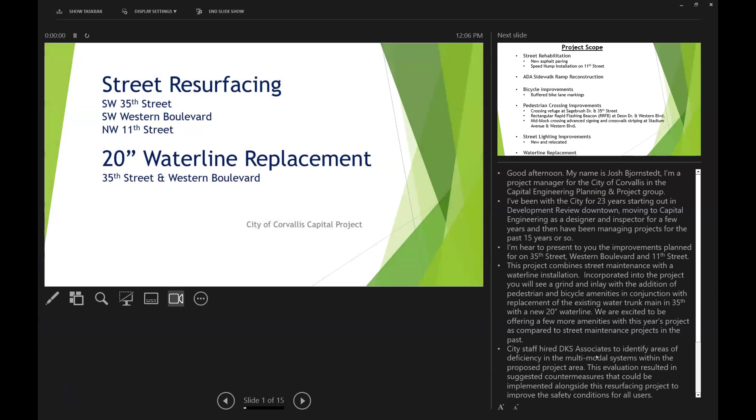Okay, everybody see that? Is that a yes? Steve, can you give me a thumbs up? I'm good to go there. Yeah, you might just want to put it in presenter mode. I'm seeing your notes. Might want to put it in presenter mode so you're... Gotcha, thank you, yeah it's full page, there you go. Bear with me here. Okay, how's that? Oh my goodness, try putting it in presentation mode before you share it. Nope. My goodness, we had this off. Unshare your screen and then put your presentation in presentation mode. I'm not totally sure if this will work either. What we were saying were your notes, we saw your notes, yeah I think I was okay. Bear with me one minute. Let's see here, go back to there. Yay, perfect, okay gosh darn, the two screens gets me every time. All right, my apologies, all right, well thank you very much for having me.

So this is this year's street resurfacing project that we are currently in design on. We will not have a street resurfacing project per se this summer. For this project, we've taken a little more time to look at other aspects that could go along with a resurfacing project, other amenities we could add as far as bikes and pedestrians are concerned. So this one will actually be constructed in 2025, and I'll talk more about timelines a little bit later. But anyway, this project will have three locations that will be resurfaced on 35th Street, and we'll go through the scope of that, and on Western and on 11th Street.

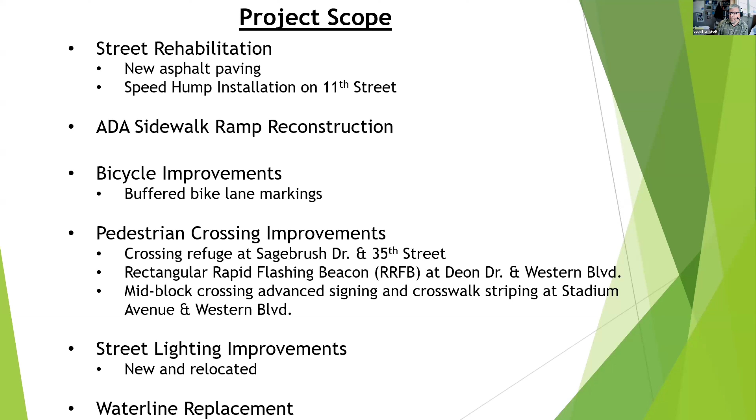Oops. Right. Well, why? Man, my apologies.

Okay, so project locations. We are looking at Western itself. The slide isn't quite showing it, but we will start our resurfacing back at the ODOT right of way of Highway 20 and extend Western all the way to 35th, then resurface all the way north to Washington Way. OSU has some improvements currently happening at Washington Way that will come in after those are done, and we'll resurface the street there to clean all that up.

We have a little stub here on West Hills Road - that's where our water line extends through that location, so we'll make sure we capture all those street improvements or resurfacing with that water line work. We do include the entire intersection of 35th and Western with our resurfacing, again because of the water line extending into that.

The other location here on Western is between 26th and 15th, and that's pretty straightforward. On 11th Street, if you recall, a few years ago we resurfaced Van Buren and Harrison, so that's why you see a gap in the darker line for 11th Street. There are also some gaps up at Fillmore and Taylor where we've got existing concrete we're going to retain - we'll talk more about that a bit later.

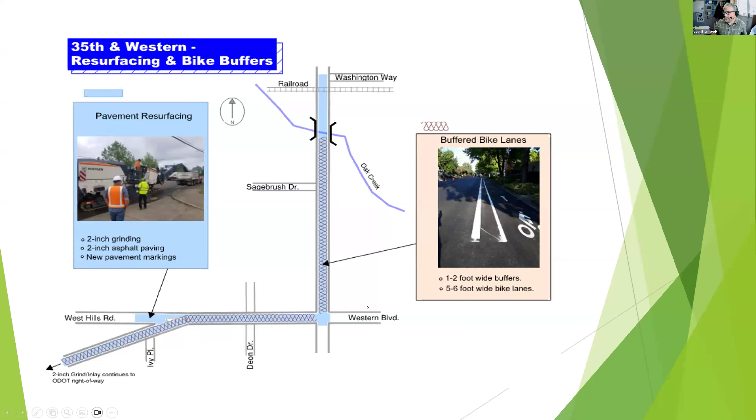We'll have some markings that go in down here at West Hills Road. We'll have some green skip that goes through there where vehicles are turning right onto West Hills, and the bike lane continues on Western. So we'll get that added as well.

In this same corridor, the green dots here are where we're proposing ADA improvements. So all of our ADA improvements are to bring the ramps up to standards for cross slopes, landings, and tactile or truncated domes.

So those locations are going to happen there, the pedestrian crossing refuge just north of Sagebrush. Working with our consultants, we determined there's a high volume of pedestrians that use this crossing, with the retreat located to the west here.

So we're going to install a refuge there with advanced warning signs. There will not be an RRFB, or rectangular rapid flashing beacon, at this time. We will set it up so that if in the future that becomes a need, we can do that. But with the refuge and the advanced signing, it's a vast improvement of what's there.

And given the fact too that it's such a straight sight distance, an RRFB at this time just didn't seem as warranted.

And then finally in the same corridor, we will be adding the rectangular flashing beacon down here at Deon. There was a couple of reasons behind that.

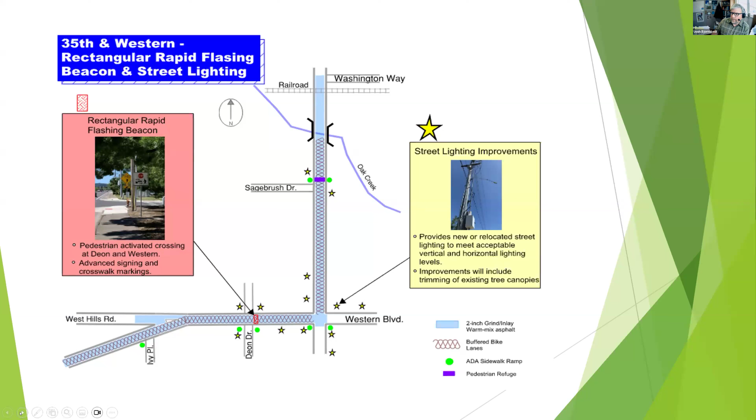So that is 35th and Western. The other part of Western is from 26th to 15th.

Pretty straightforward there, it's a grind inlay. This may change here - I was originally showing this as the turn lane from 26th into Western, or Western into 26th. That asphalt was rather in pretty good condition. We also had some loops in that location that we were trying to avoid.

Once you start getting into that stuff, we were upwards of another $100,000 or so. So we try to do our best, if it's in good condition, to not affect some of those costs on the project. But it turns out we may be impacting loops no matter what.

So this may be a resurfacing all the way to 26th. We're still kind of evaluating that.

As far as bike lanes go, bike lanes will be on Western, but the buffer itself, we start to run out of room in width by the time of that turn lane, the right turn lane, and the added left turn lane. So bike lane buffers will extend from the start of this turn up to the western side of that existing mid-block crossing that's there. We've got sufficient width to provide a 1-foot buffer - it's not the 2-foot that we like to get.

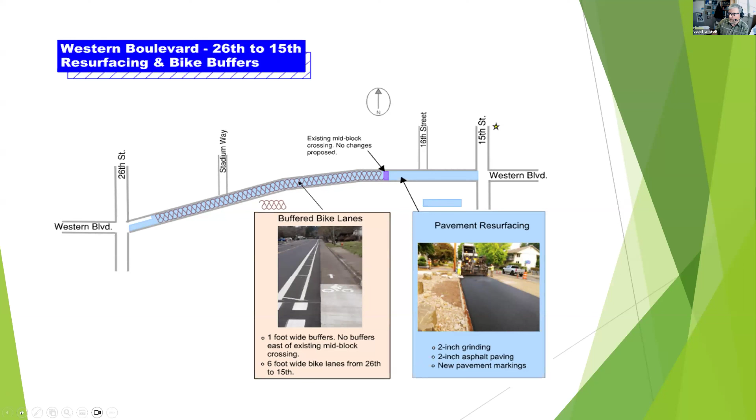Typical 2-inch grinding, 2-inch paving for this section.

In this same section, again, our ADA ramps are the green dots. So we are looking at improving the 2 ramps there at Stadium Way and the 2 ramps here at 15th that are shown. This corner of 15th, the northwest corner there, we are going to actually modify. We're going to enlarge that radius to help our transit make that turn a little easier. Currently now we hold back traffic stop to make a left onto 15th just to help with the buses turning, which has helped, but we have the opportunity to make that a little easier turn for buses by widening that. So we'll end up rebuilding that ADA ramp that's there.

We do not do anything with the mid-block crossing that's currently there, just west of 16th. We do add the lighting as shown on here. I think for the most part, there is lighting there, but we're relocating it again to help with more of that horizontal illumination on pedestrians.

This mid-block crossing here at Stadium Way is a fairly utilized crossing. It is kind of the access for the softball field and the soccer field over there, and at times it can be traveled pretty heavily. So what we're going to do there is some advanced signing. We'll actually stripe a crosswalk on Western. Currently there is no crosswalk striping there. So again, with that added enhancement, we're hoping that will help bring awareness to people crossing in that location.

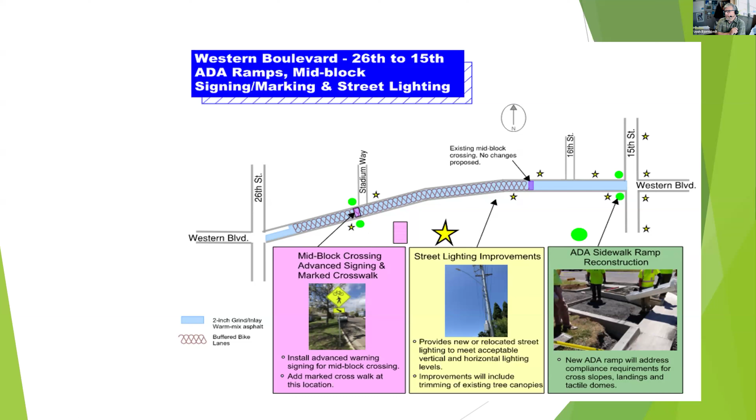So now 11th Street. We are looking at, like I mentioned, kind of resurfacing in between what we've done already there. So again, Van Buren and Harrison was recently done. All the ADAs are done at the corners. And this other area we're skipping out here is existing concrete that's down, which is in very, very good condition.

We are going to leave it as concrete, and we will pave asphalt up to the limits that are there. It's a good material that's down, in very good condition, and just didn't seem to make sense to tear that out just to put asphalt back in there.

The location at Polk and Tyler, my next slide will show some ADA ramps being done at these locations. That's going to be a more extensive full depth reconstruction. We've got some drainage patterns in those locations that lead more to a corner drain, and we want to push those drains to the outsides of our ramps. So there'll be a little bit of reconstruction work happening in those two locations.

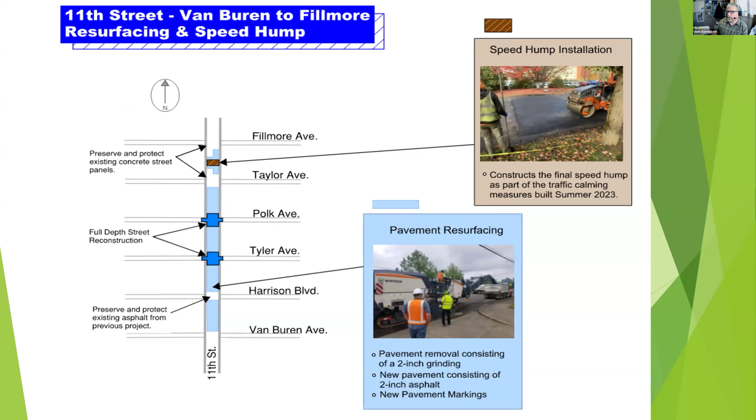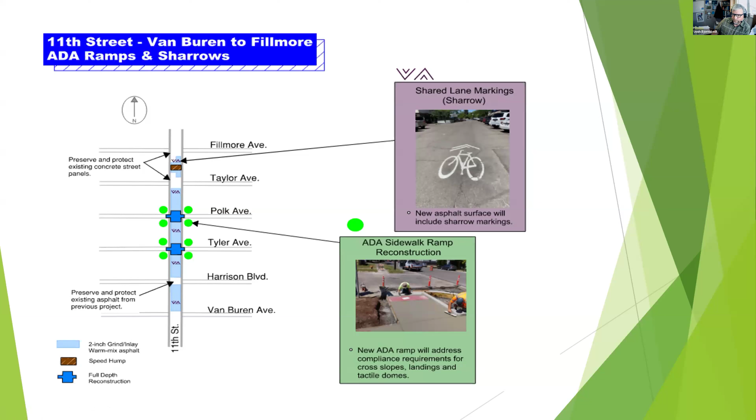The final thing I wanted to talk about here would be the waterline project. It's a major project - I know maybe a little off topic of what this group's here for, but it's really driving a lot of what we're doing as far as our resurfacing limits go.

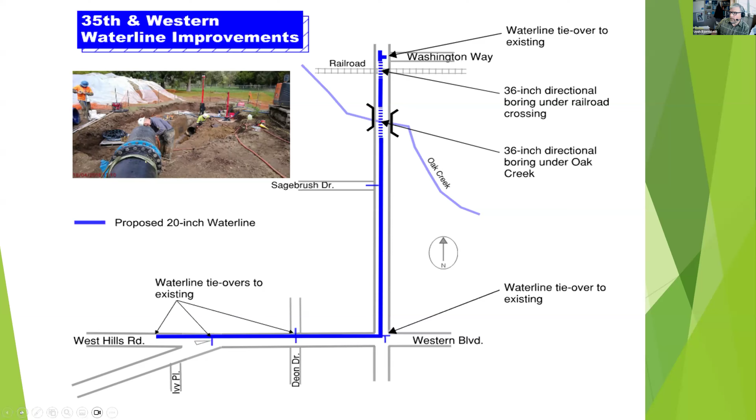That's kind of the scope of everything visually. Project timelines - like I'd mentioned, we're getting through design. The target is to be completed by mid-August. We'll be advertising for bids here end of August, first part of September.

Construction is really going to happen in two parts. The water line would be going first, of course, anything underground. We're hoping to get started on that this coming winter, maybe a November, December start. And then streets would really start in spring of 25 and run through the summer and be completed.

I should mention that with the waterline construction in particular, the area is going to see some detours and changes in traffic patterns for a decent amount of time. So just be aware of the work that's happening, and the need to have that right of way to be able to put that water line in. There'll certainly be some changes there, and we'll have some bulletins and notices that go out alerting the public to the changes that are coming.

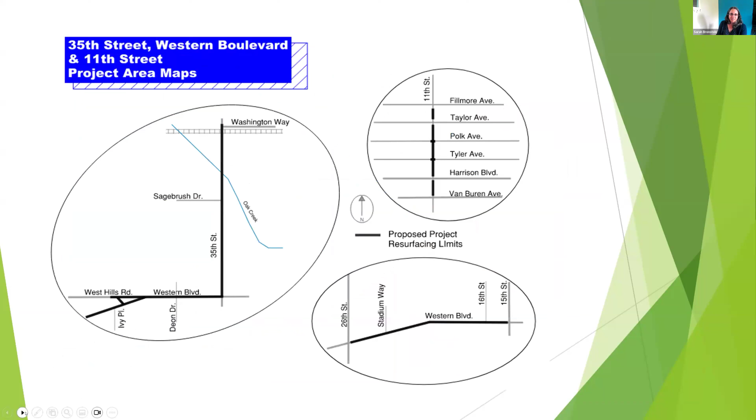Great. Here's a question that's come in, taking us back to 35th. So at 35th and Sagebrush, which is where the new crossing will go in. Yeah, thanks for getting us back to that context there.

Perfect. So there was a question about whether that crossing would be designed to accommodate bicyclists. That connection there is critical just because it will be a primary connection for cyclists to get to the cycle track north on Washington Way. And there's also, while it isn't signed as such, effectively a multi-use path along the side of 35th there that connects currently to the multi-use path on the south side of Washington Way.

Yeah, we can address that. We're still in the process of designing that. I think a wide throat to accommodate bike use would be good. I think we're already calling out about a 10 foot throat on that thing. But there's an element of getting the on-street bicyclists positioned so they can cross perpendicularly. We did a little bit of that on Circle last year at Crystal Lake or Jack London. I think we'll work with Josh a little bit, there's maybe a few aspects of that we can improve this go around. So yes, we will certainly look at being able to accommodate bicyclists at that crossing as well.

Great, thank you. Here's a more general question. I know you mentioned that you started off all of this work by engaging a consultant and doing some evaluation. Presumably there was some data collection that was part of that process. So this question is asking what data was collected and went into the initial decision making, and is that data that can be shared?